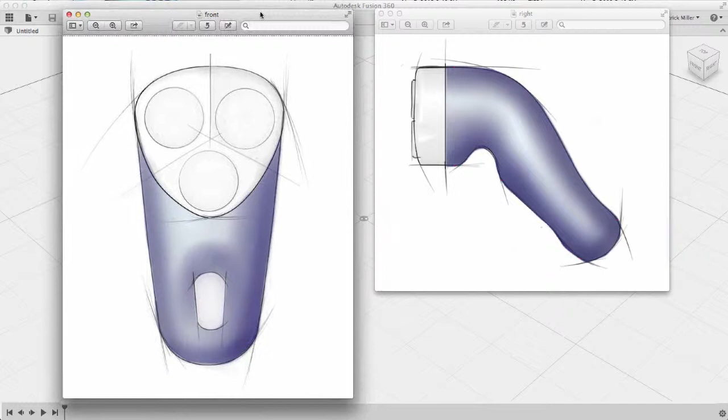So it's just a front view and a side view, and I want to base my design around that. I'll go to File, New Design, start a blank canvas, and I want to first go to the Insert pull down and insert an attached canvas. So this lets me bring an image onto a plane.

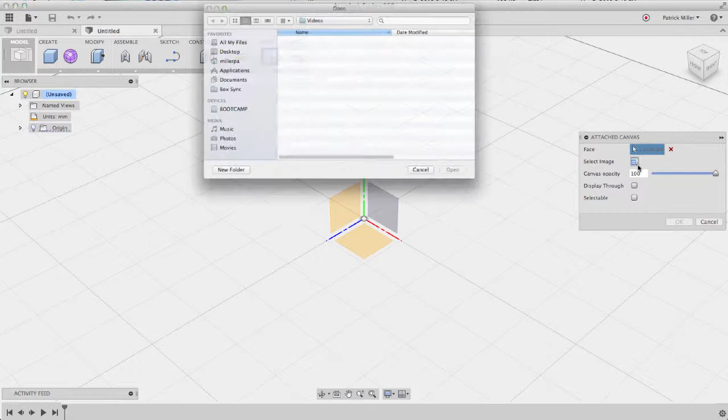I'm going to select the plane that I want, browse out to my image. So this was called front, and it comes in pretty small. So let's do some tweaking here to get it what we need. I'm going to scale it up. I want to set the opacity, so I'm going to set this to about 50%.

That lets me see through it, but lets me see enough of it that I can model around. I also want to set the display through option, so I'll turn that on. That will let the image show through any geometry that's in front of it. And I will make sure that selectable is off, so that as I'm creating and editing geometry, I can't accidentally pick the image.

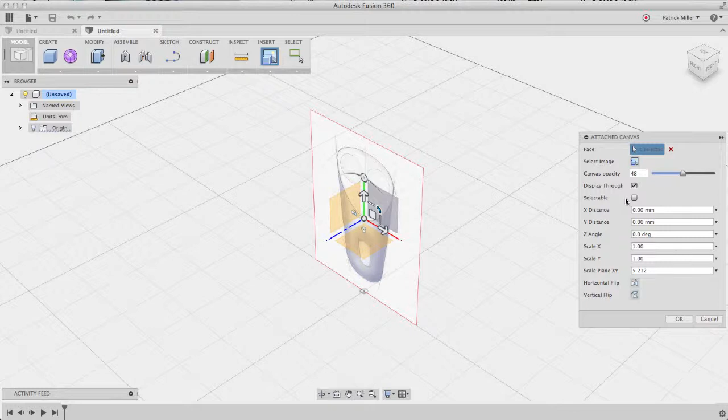All right, so my settings look good. I'm going to click OK, and you'll notice there's our sketch in Fusion, and in the browser you can see I have canvases, and there's my front view. Now what I want to do is make sure this is sized appropriately.

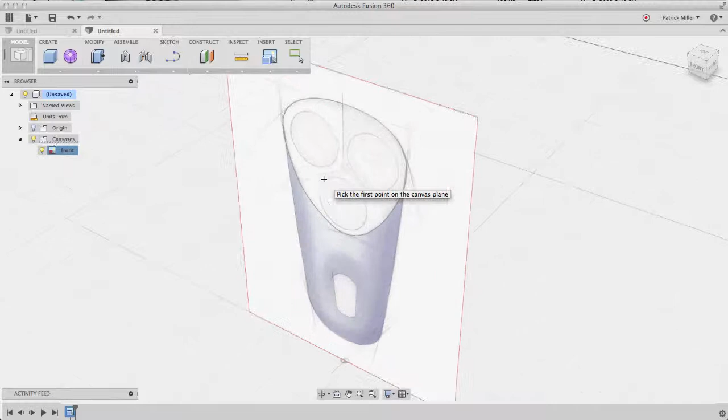So I'll use Calibrate, and that lets me pick 2 points on the image. I'm going to pick the 2 widest points of the shaver body here, and I know that should be about 50 mil. All right, so now my front image is positioned and sized appropriately.

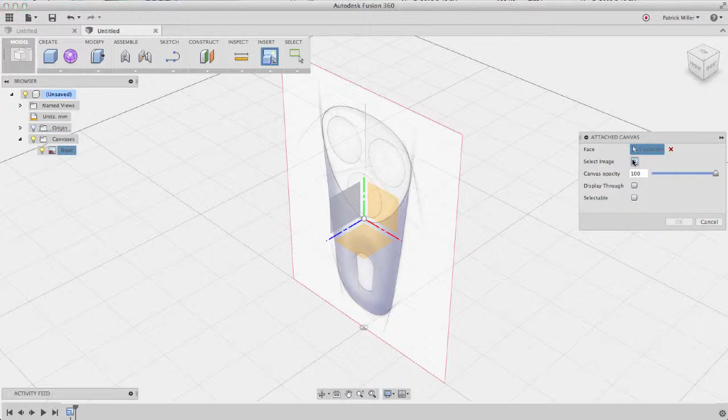So I'm going to repeat the process. I'll go to Attached Canvas, pick the side plane, browse to my right image. And again, it comes in small and rotated incorrectly, but that's easy to change. So I'm going to scale it up, spin it 90 degrees. I want to go back and set my opacity and display through settings like we did before.

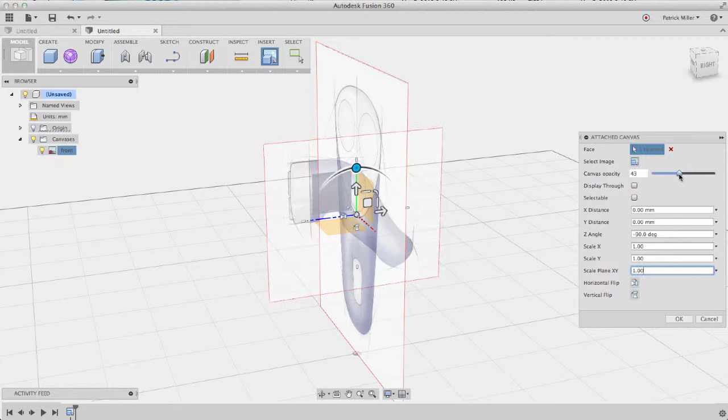And now instead of using Calibrate, I'm going to scale this and position it based on the front image. I know that the 2 edges there should line up, so I'm going to scale a little bit. I'm going to move it a little bit. And let's rotate around. That looks pretty good.

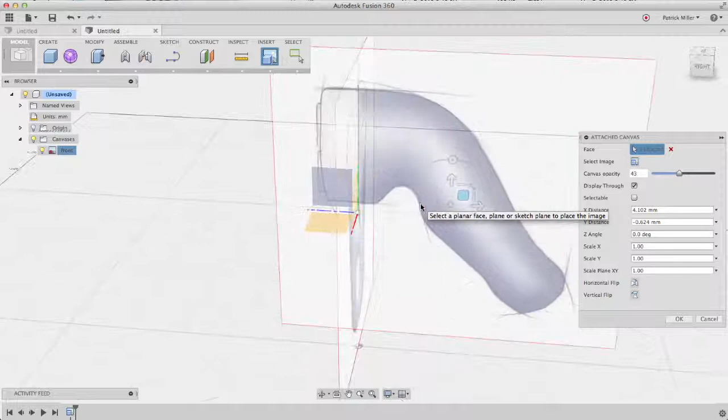All right, this is probably a good point to save the file. And because this was a new file, when I save it, it'll prompt for a name and a project to save in. Saves after this just create new versions, just like you would any other application.

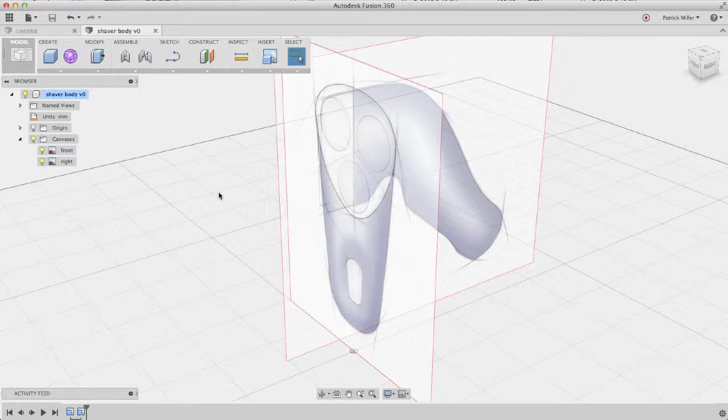Okay, now that I've got my images, I'm going to start creating some geometry. So looking at this, it's pretty curved. I probably want to use the Sculpt tools. So I'm going to create form to get to my Sculpt tools. And this looks somewhat cylindrical, so I'm going to start with a cylinder.

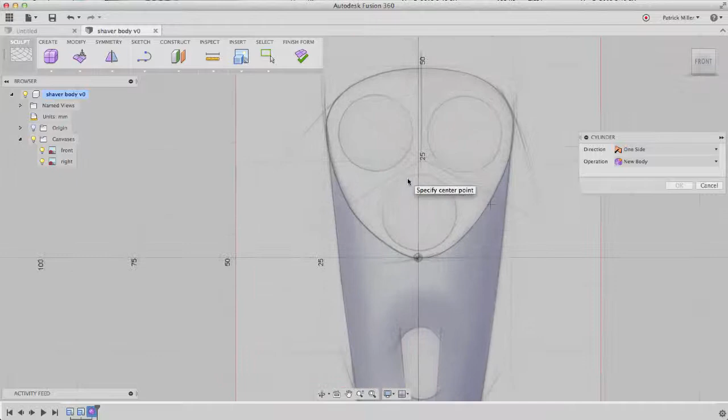Pick the face to put it on. Pick a center for my cylinder. Pick another point to define the diameter. So again, I'm using my images to size this correctly.

Now let's give the cylinder a height and drag it out, and I've done this a few times. I know I want it to be about 80 millimeters. Oh, wrong way. I want it to be negative 80 millimeters. And I need more than 4 faces, so I'm going to drag the slider, and I know I need about 6 faces to get this shape.

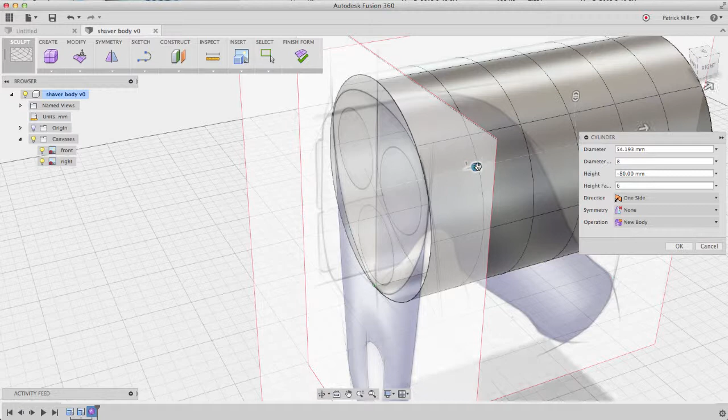All right, well, I've got a cylinder. How do I get that in the shape of that shaver body? And what I'm going to do is use Edit Form and start rotating and scaling faces and edges.

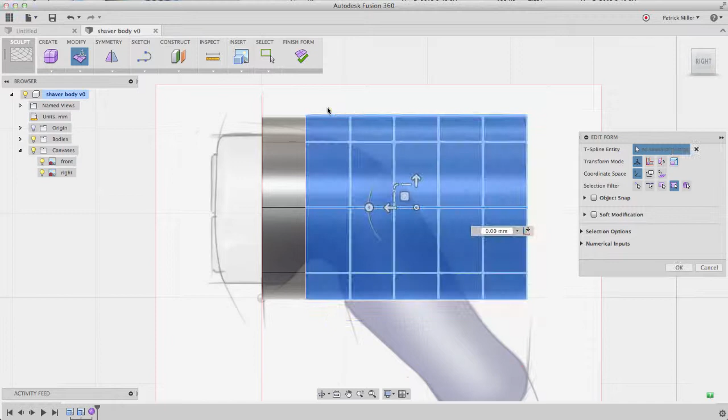I can window select, and I'm going to rotate that around. I'll click in a blank area to clear my selection, and window select again to get some other faces. Oop, and that's not correct. Let me select again. And let's window down there to get, there we go.

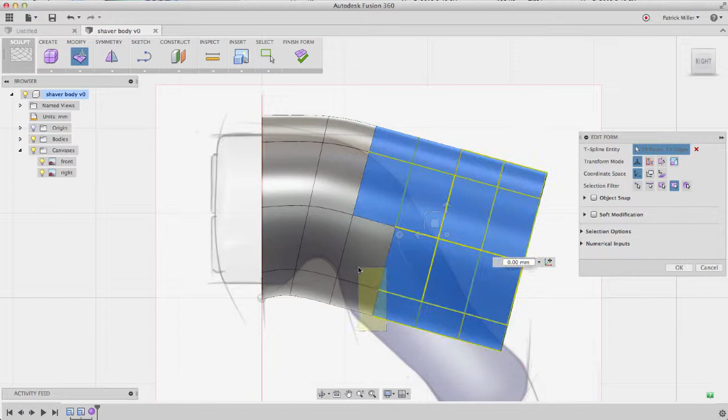That looks good. Rotate again, scale, rotate and translate. And now we've got this at kind of an awkward angle, so let's try the paint selection to grab my faces.

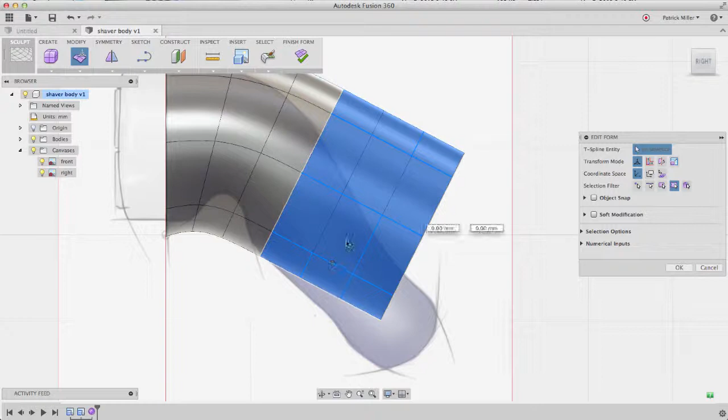So what I can do with paint is click and drag over faces and edges to select those rather than using a window. So again, rotate, translate, pick to clear, drag to select more, rotate, translate, and it's starting to take shape.

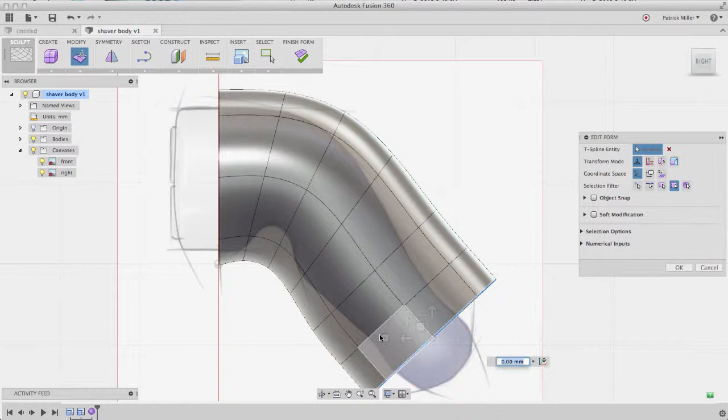So I'm going to go back to Window Select, and now I'm going to double click some rings or some edges to get the entire ring. Hold Shift to select multiple and start scaling to get these the right size. So scale and translate.

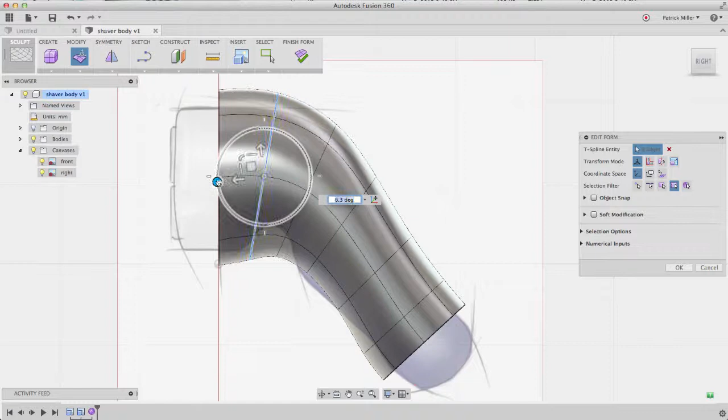So double click to get a ring, scale it, rotate that ring, and keep on picking and clicking through here. If you don't want to see all the picks and clicks to get this shape, you can skip to about the 8.5 minute mark where I finish the form.

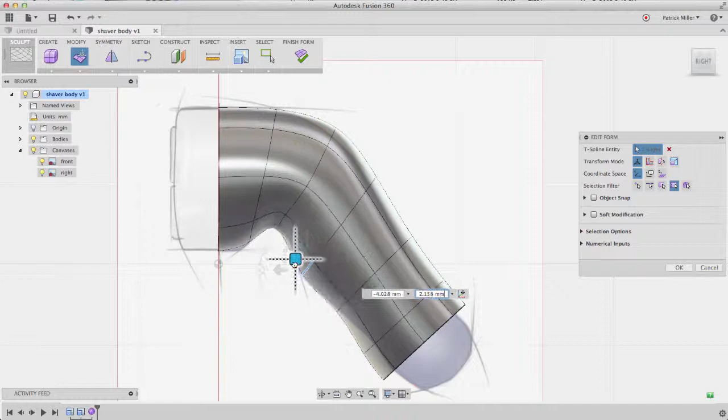Now I'm selecting and moving some edges. Rather than grabbing an entire face, I'll window select and get some edges for more fine detail, just grabbing single edges instead of an entire ring, moving them around. Again, I'm using the concept image I've placed in here to determine where to position objects.

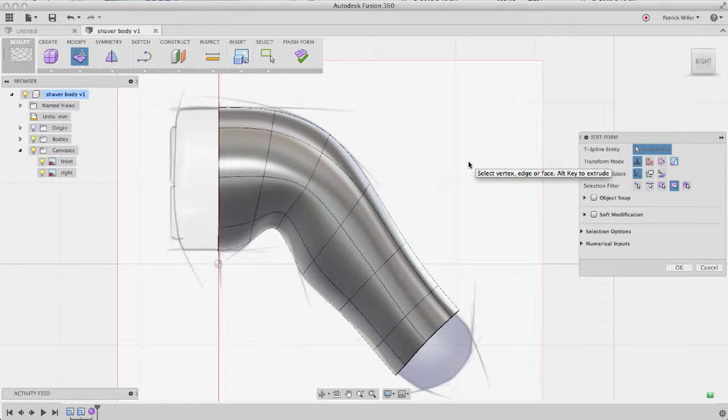All right, so now I'm looking at this, and I think my side view looks pretty good. But if I rotate around, my front view is a little bit off, so I'm just going to do the same thing and use Edit Form.

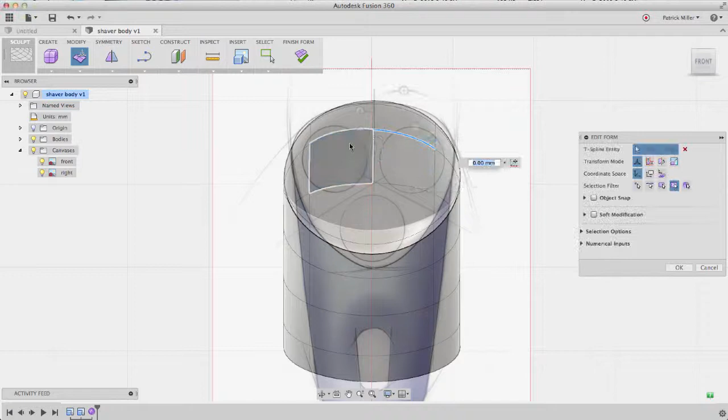Let's grab some faces. I can window select to grab a bunch of faces, or select individual edges to do some finer editing. And I can rotate—that's not the right edge, I need that one. The bottom edge, yep, that's the one. Move it down a little bit.

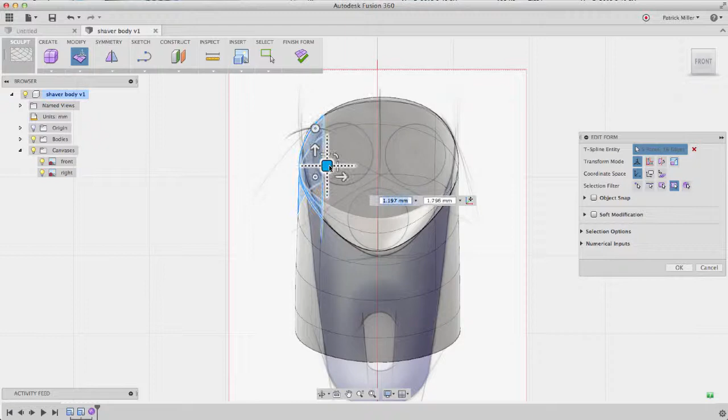One thing I just noticed is I needed symmetry here. If I move these faces on the right, the faces on the left aren't changing with it. I could have done that when I created the model, I forgot, but that's okay. I can go to the symmetry pull down and use Mirror - Internal, which adds symmetry to the existing faces.

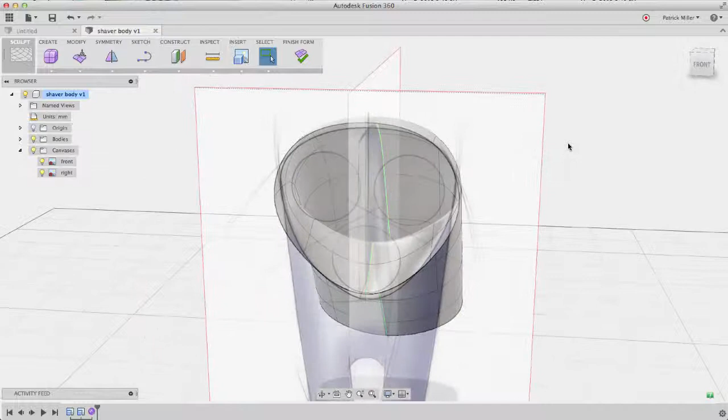So I'll pick one side, pick the other, and that green edge there shows where the mirror happens. Now when I make changes on the right side of the body, the left side will adjust as well.

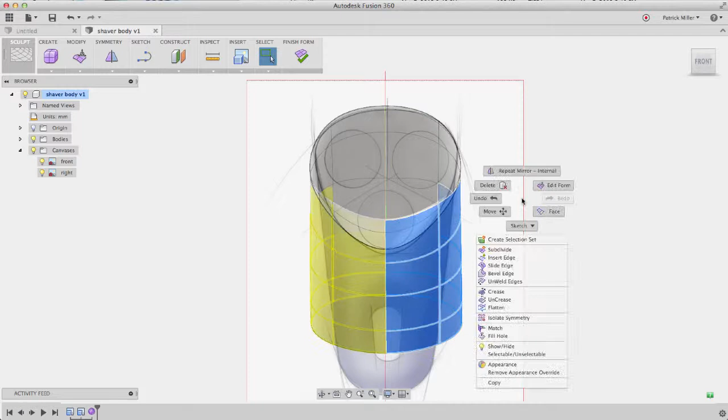All right, so we're almost there. I just need to add that kind of tapered effect, so I'm going to grab a bunch of faces. Let's rotate, translate, and that looks pretty good there.

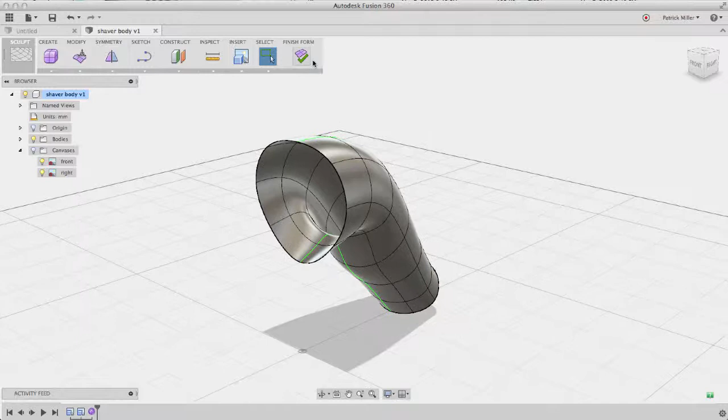All right, so starting to take shape. I like the way this form looks, so I'm going to turn off my concept images. Finish Form takes me out of the Sculpt tools, and now I'll start doing some more manufacturing type features. The first thing I notice is that this is an open body.

I don't have a cap on either end, so I'm going to go to Patch to create those caps. This one's easy, it's got to be a flat face, so I just pick the edge and say OK. And if we look at bodies, I have two surface bodies.

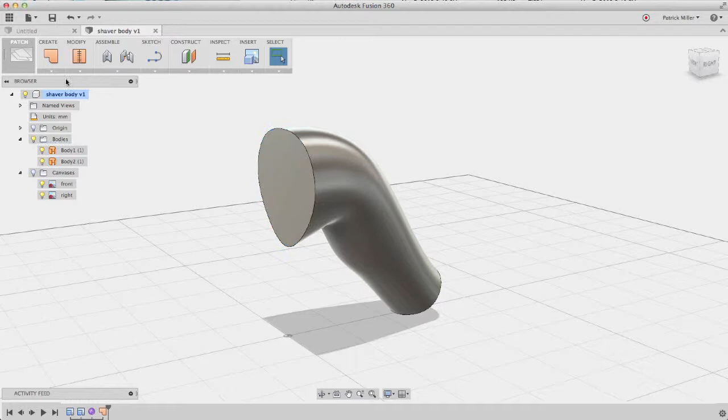Now I'm going to cap off the bottom, and in this case I want that rounded edge, or rounded face. So when I pick the edge, I'm going to set my continuity to curvature, and I get that nice curved surface.

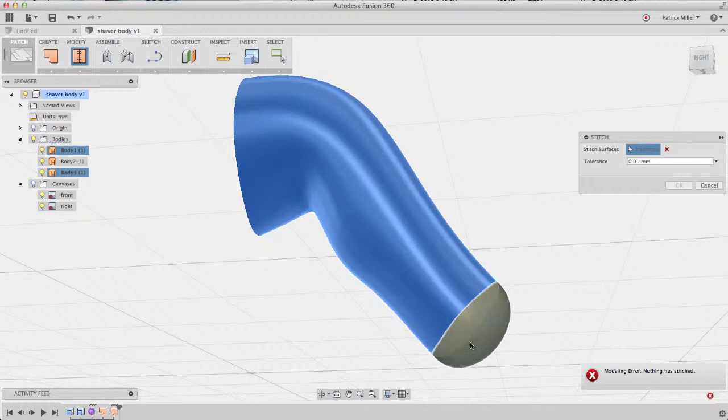Then I can stitch these all together to make it a solid. The red edges show open areas, and I didn't pick the bottom one quite right. Let's pick—there we go. The green edges show where it'll actually be stitched to a solid, or where they connect. So now you see I have a solid body there.

And all this is recorded in my timeline too, you'll notice at the bottom. Now I'm going to go to Model to do some manufacturing features.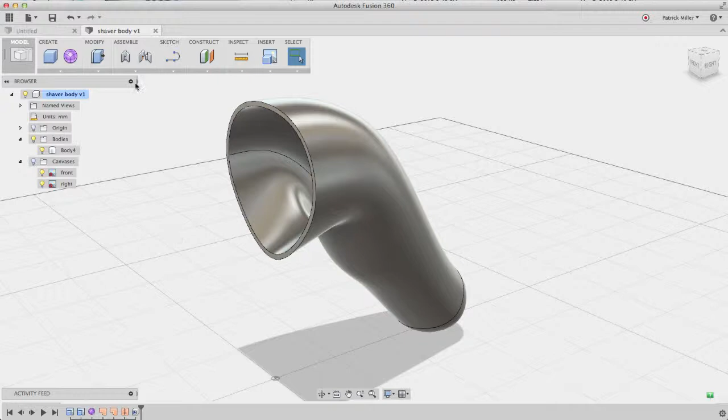So I want to shell this. I'm going to shell it, open up that face, give it a 1.5 millimeter thickness. And this should be a left and a right half, so I'm going to split this body into two pieces. I'll use the origin plane, click OK, and now I have a left half and a right half.

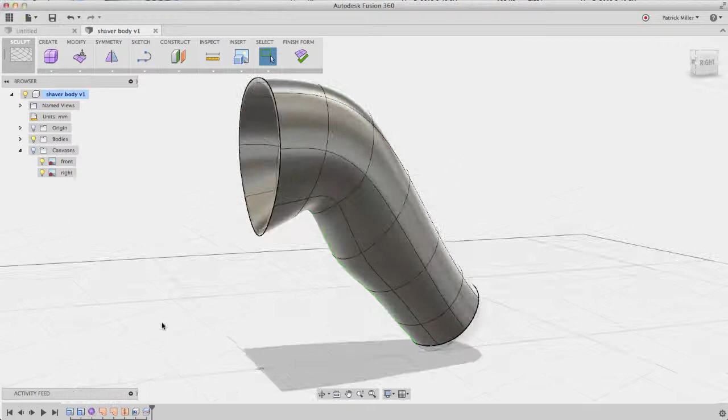And what's very cool with the timeline is if I double click my form, that takes me back to the T-spline body I was working on originally. And maybe I want this to be thinner, or I just want to see what it looks like if it was thinner, so I can go in and edit form.

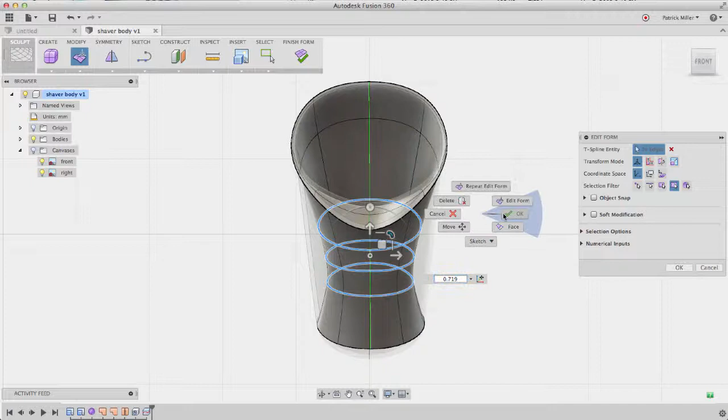I'm going to scale down looking at the right view, then go to the front view and scale. I can already tell I don't like this, but let's see it through. So I can finish form—my operations are recalculated, and you can see my design updates.

So that's an introduction to how to start a Fusion design using some concept images.